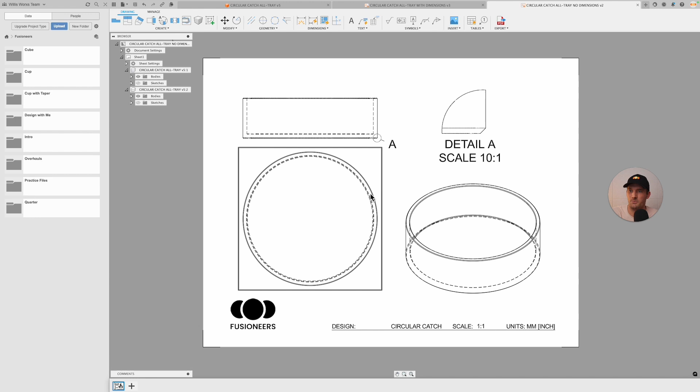You can go ahead and measure this if you want to practice figuring out the sizes of things. So this is to scale, you just use a micrometer, and this is just the end result that we're looking for. And this is a 10:1 scale, so remember whatever you measure here, you need to divide by 10. And these units are in millimeters for the most part. So pause the video now and make those measurements if you want to.

And so this is roughly what you should have gotten with the measurements. It's not terribly important, but this is what we'll be making today. So, all right, let's go ahead and save, Command S, and we're going to call this circular catch-all tray. All right, now it's saved over here. I'm just going to go ahead and exit this out so I have a little bit better view.

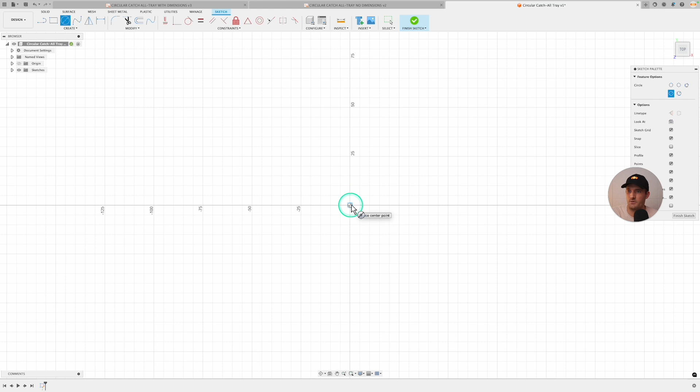Okay, and we're going to click C for circle, and your origin should come up. And now we're going to make our center diameter circle. Actually, let's go ahead and make the other circle here. So click C again, and we're going to make this a little bit shorter. So this is going to be our wall here. And then let's dimension this.

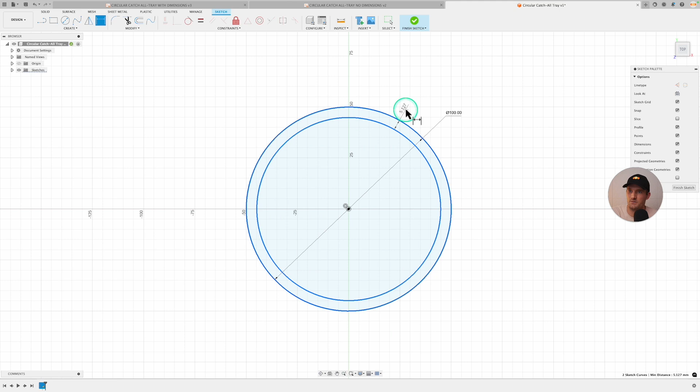This is 100 millimeters. And then we'll just say this one is 3 millimeters from the edge to give us our 3 millimeter wall. You could also do this with an offset if that makes more sense to you. And then click Finish Sketch. And now I'm just going to go look back here to see our thickness. So we made this 100 millimeters, and then our inside was 94 millimeters. We just use the offset instead of typing that in.

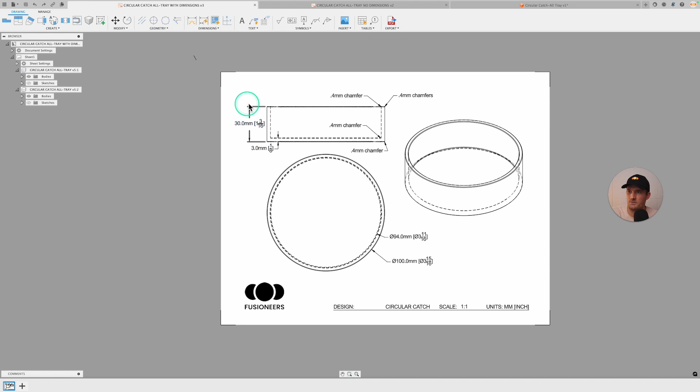These are 3 millimeters, and then our total height is 30 millimeters, and then our bottom here is 3 millimeters tall. So the inside right here would be 27. All right, so let's extrude. Click E for extrude, and then we're going to select both of these. We're going to extrude up 3 millimeters, and click Enter.

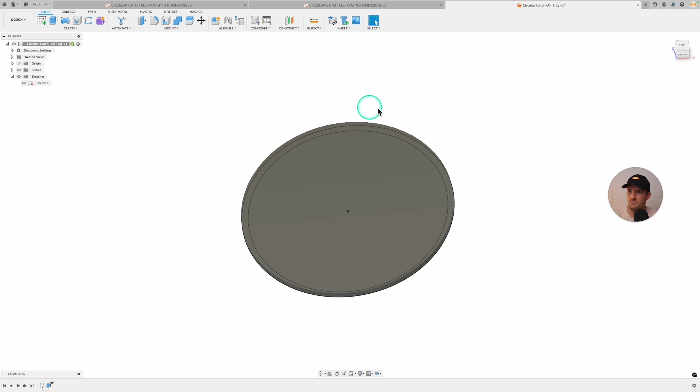And then we have to come over here and just turn our sketch back on, and now we can come and select here. And then click E for extrude, and then we're going to go up 30 millimeters. And then obviously right now it's cutting that away, so we need to go to the extrude menu over here and click join, and then click OK.

And so now if we want to measure and make sure that our dimensions are right, you can click here on the bottom and then hold Option, and then you can click on the top. And then down here on the side, you can see it's 30 millimeters tall, which is what we want. And then the inside should be 27, which is what you see down here.

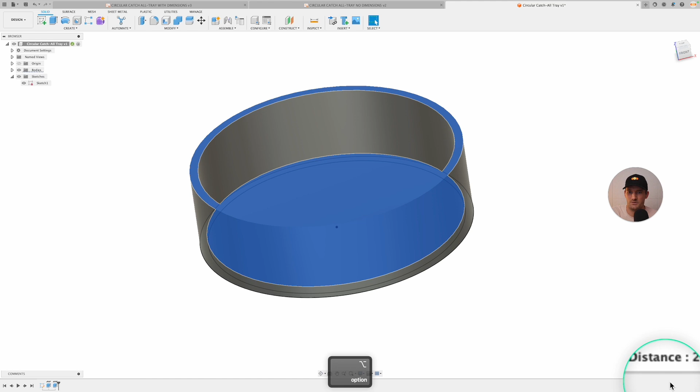Okay, and so the final thing that I have here on the instructions is this 0.4 millimeter chamfer. And the reason I do that is it just makes the part look a little more professional. And it's really easy to do, and I do it in increments of typical 3D print height. So the most common height that I've seen is 0.2 millimeters, so it's just 2 layer heights chamfered over.

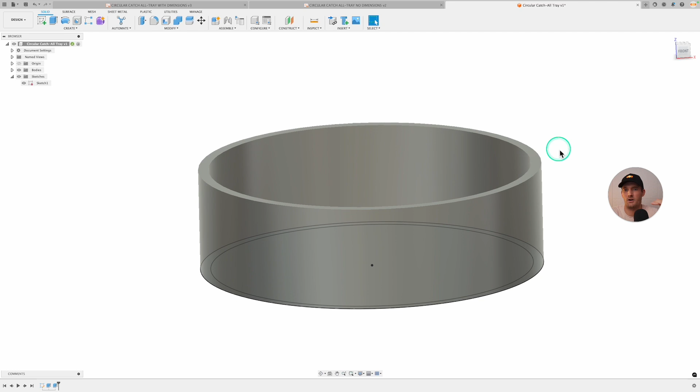So we can go ahead and click Modify, Chamfer, and then basically all these edges are chamfered. Might be hard to tell in the drawing, but 0.4. And now we have our little catch-all tray. This is kind of like a bowl catch-all tray. You can make this, print it off, and put stuff in it, kind of have something handy. And obviously you can make different sizes as you see fit.

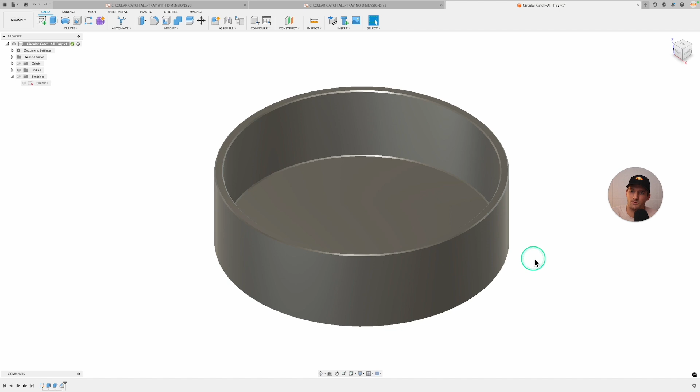In the next couple of videos, we're going to make this a little more complicated looking and put some finishing touches on it. So hopefully you'll get something out of it.